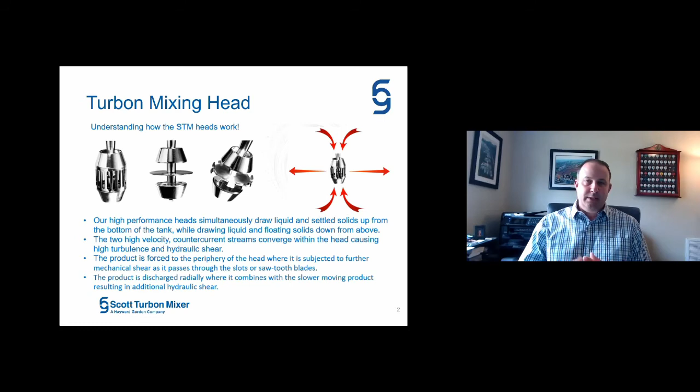A quick mixing overview. So yes, there is a mixer that can provide both flow and shear, which is what I was describing with the impeller vanes. These are shear controlled processing, gas dispersion, homogenizing, emulsification, powder incorporation, and dispersion. This is where you really see a lot of our products incorporated: viscous blending, solid suspending, and liquid blending. We can also handle that because of the uniqueness of our impeller. A lot of times, especially with solid suspension, you'll see more incorporation with a low shear mixer like a Lightnin mixer.

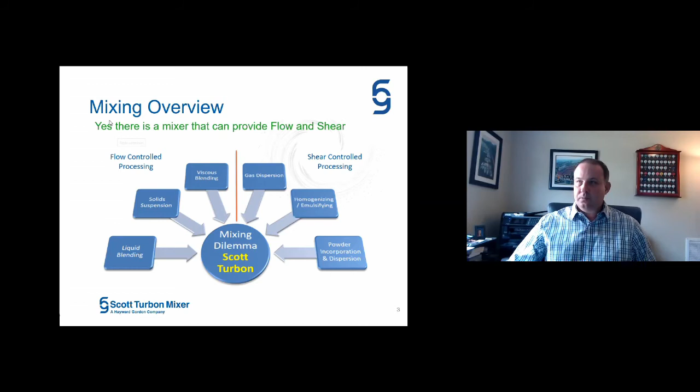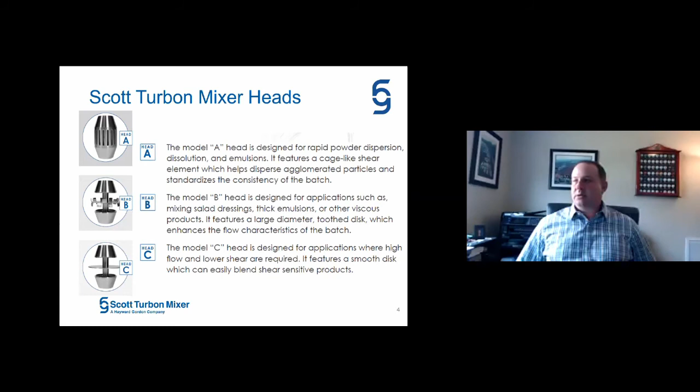So we have three head designs: the A head, B head, C head. The A model head is designed for rapid powder dispersion, dissolution, emulsions. It features a cage-like shear element, which helps disperse agglomerated particles and standardizes the consistency of the batch. The B head is probably the most used within the Scott Turbon line. It's designed for applications such as mixing salad dressings, thick emulsions, or other viscous products. It features a large diameter tooth disc, which enhances the flow characteristics of the batch.

I'd say 75% of the applications I've come across have had the B head, and probably another 20% are the A head. There's just a small category with the C head where they're looking for flow, but not as much shear. So the A will give you the highest amount of shear, and the C the least. Now, is the A and B mostly radial flow? Like a donut? Yeah, it's a little bit of both, but once it passes through the cones and hits that shear plate, it will be strictly radial flow. Okay.

And one thing we do, especially in hummus, which is a big thing for us right now, is sharpen these teeth to help get you a finer product, less chunky, more broken up. And they can come in welded designs. You'll like our LA1 lab unit. It comes with all three: you get the cone, and then the cage insert, the sawtooth insert, and the flat blade insert, and the cone is interchangeable with all three. There's a nut and a bolt at the bottom, undo that, pull the whole piece off, replace the center section, put it back on, and you're ready to go.

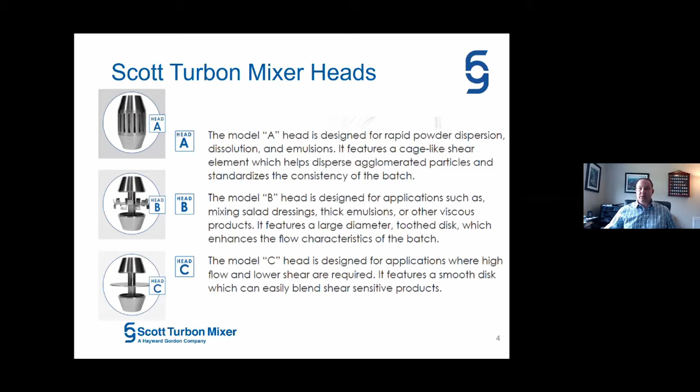Now, when you get into the larger units, the customer specifies which one they prefer. But we do a lot of trial units, and we can get into that later. That's the one thing I regret leaving out of the presentation, more on our lab units and our lab itself in Adelanto. But we can talk about that at the end and walk through it.

This is kind of the bread and butter of Scott Mixer. This is our top mount, our TM mixer. It comes in several different sizes. You'll see TM1 or TM2, 3, all the way up to 7. They can get rather large.

Pretty simple terminology and components. You got a motor, you got a bearing frame, a mounting flange, a shaft, and the head. They're direct drive units, and there's no bottom bearing in the head itself. It's freestanding.

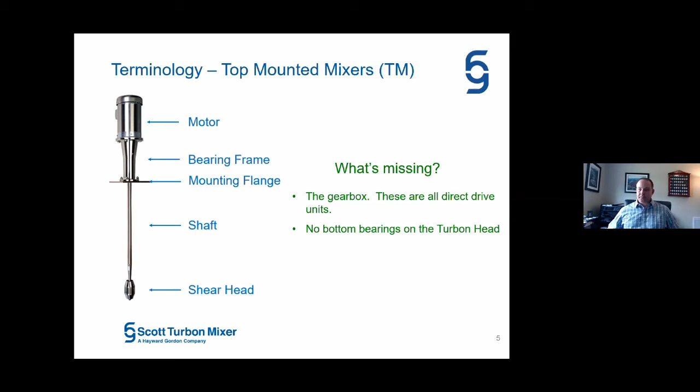So some of the benefits of the Scott Turbon mixer is reduced batch times. A lot of you guys probably attended our viscosifiers or viscosity modifiers little short course, but you can take incorporating a gum from hours or half days to minutes by incorporating it with a high shear mixer.

Proper dispersions, so reduction of waste ingredients and maximum product yield, bench to pilot to production scale up. We've got a lot of know-how with our scale up, increase capacity without adding an entire production line, batch to batch consistency, specifying the correct mixer for the application is obviously key, and low maintenance and easy to clean mixer heads. Not having that bearing and that rotor stator really makes it pretty much maintenance free, and the cleanability is much easier.

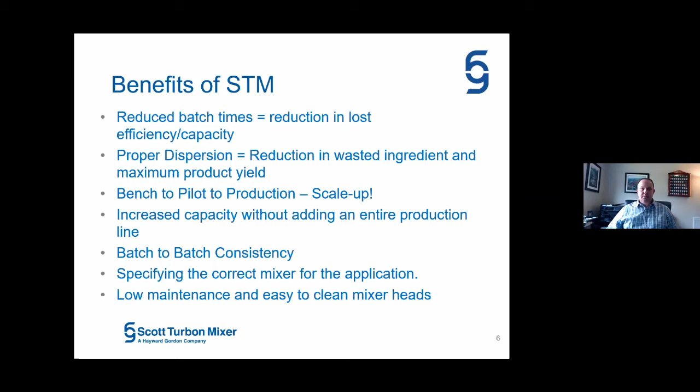Talking a little bit about our scale up knowledge and how we can do that. This is what we call our LA1, which we have two smaller versions. This will handle up to a 5-gallon bucket, maybe 3 to 4 gallon mix batches. This does actuate, so it raises up and down with this actuator in here.

We trial these quite often. What we usually do is we usually have about 2 to 3 of these on the shelf at a time, so typically they're ready for immediate shipment. And I would say 75% of them don't come back. So we try to usually ship them new because most customers end up purchasing them.

And then we can move to a little bit larger scale trial units. Depending on application, some people use these as production units. But on the pilot scale, this can also be something that's on a trial agreement and done at the customer site. But we can also perform these tests in our R&D facility in Adelanto, and the units are available there. Customers can come out and use the lab, or we can do the trial, have them send the ingredients and do the trial for them.

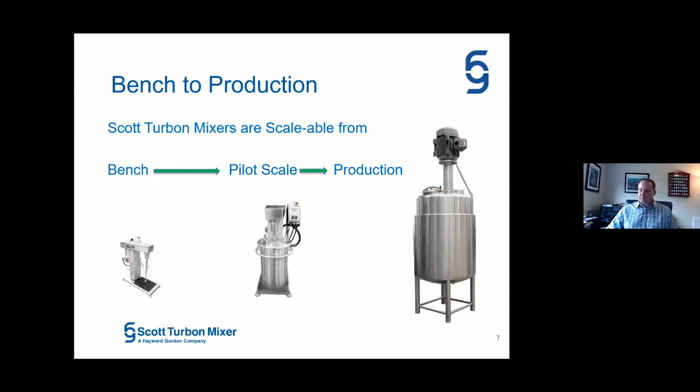We also have the bottom mount mixer. We have them both in direct drive and belt drive. This kind of gives you just a layout of what the belt driven looks like. Here's the unit itself.

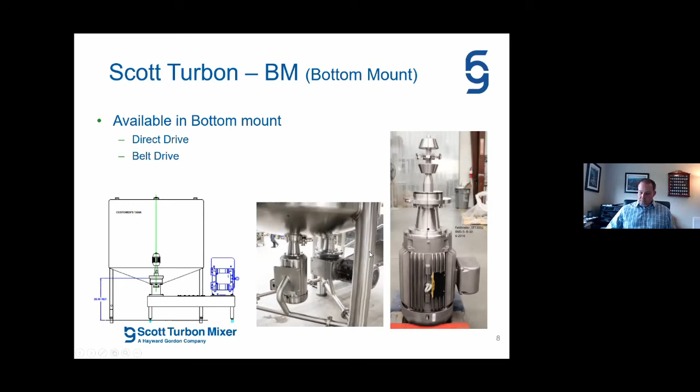So another product that Scott Turbon has that we've done really well with, and this has really lent itself to the food industry, again, the dressings and sauces, but ketchup, mayonnaise. We do quite a bit with mayonnaise production, and mustards, basically any of your condiments, barbecue sauce, is our hydraulic ram units for production scale.

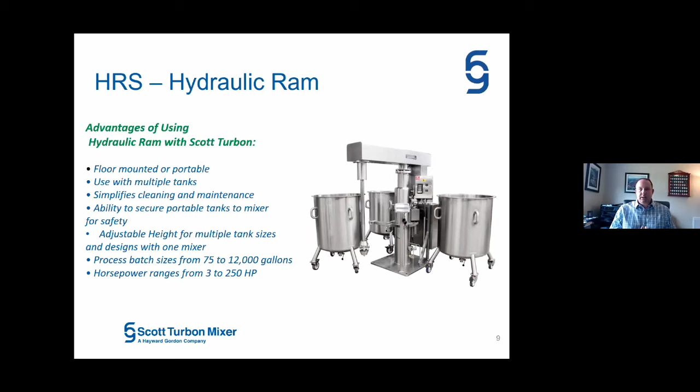Another product that you all have to offer is our VacuBlend powder induction system. The VacuBlend system offers the benefits of the inline mixer coupled with a vacuum pump to incorporate powders. The HSM or HSP, I'll get into that when we get to the inline mixer, but those are our two different models of inlines that are available. Ingredients are pulled through either a wand or integrated through a hopper, and then processed into the system.

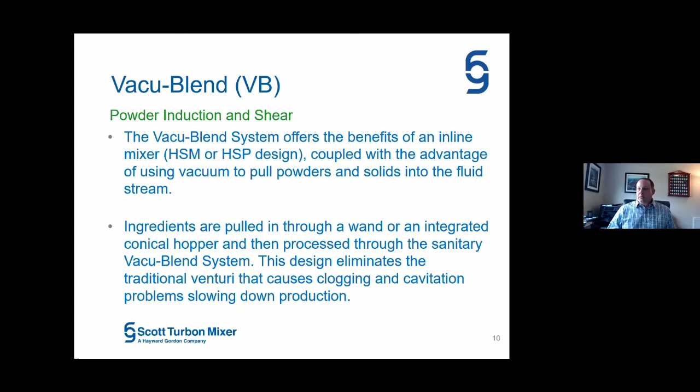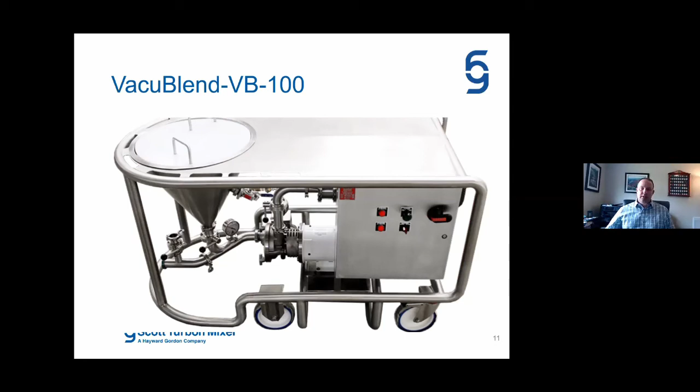This is a really good application if you see people up on top of a tank, maybe a small platform, having to manually lift all the bags of product up to the top of the tank to dump it in. This is slick because you can basically install it right down at ground level and hook your hoses up to it, and then you can do it in one pass into the vessel, or you can make it a recirculating piece of equipment.

Some other stuff, and you'll see this is where you're talking about the cosmetic world, but we'll do vacuum process vessels and mixers to incorporate a scrape agitator and a high shear agitator at the same time, as well as all the controls to go with it. So we can get pretty elaborate with some of the designs and some of the things that we can do.

Yes, Justin, you have this in lipstick, mascara, just about any type of... Yes. Maybelline and all the big users. Yep, and yes, Mary Kay is a big customer that has got some of our units. We also do a lot with creams and lotions and ointments, especially pharmaceutical grade type ointments.

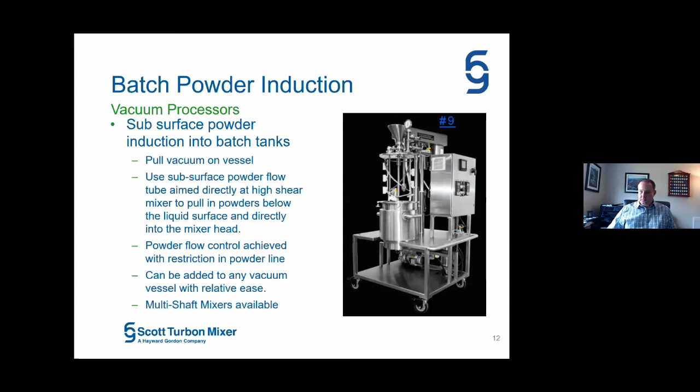Our inline shear pump. So the HSP or HSM, available in both configurations. Shear pump for pumping with rotor stator. And I wish I would have added another picture here of the mill head or the heads themselves. But the only difference is basically your rotor and your stator. We've got one that basically provides more pumping. This is not meant to be a primary pump. This is meant to emulsify or introduce powders or shear.

It's meant for shear. But we have one version that does a better job at pumping than the other, and the other does a better job of milling than pumping. So they both do create flow. We just need to look at how far and how high they're trying to push the product. But we offer the two different types depending on what the customer's trying to do. It's just a swap out. The HSM is a little bit more expensive cost wise, just because of the machining time.

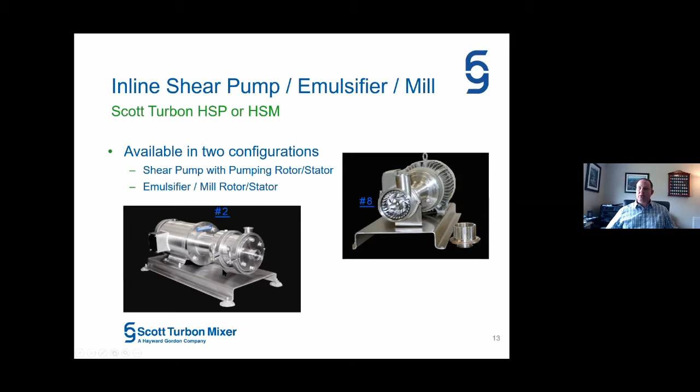That's why I wish I would have tried to find a picture for the two different headsets. You'll see one that definitely has just more vanes in it and less teeth, for lack of a better term. Where the mill set is a lot more busy, a lot more teeth involved in it. So the time to machine it is significantly more. But this is what you'll find inside, also incorporated in the VacuBlend.

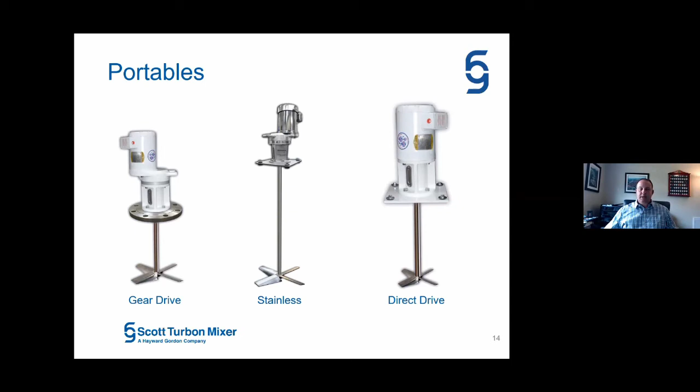We do offer a line of portables, sanitary portables, through our partners with Sharpe, but we white label them with Scott Turbon. So they will come out as a Scott Turbon mixer. But we've got lots of decades of experience with the portable line behind us, with lots of different options, mounting configurations. So as you all know, there's portables everywhere.

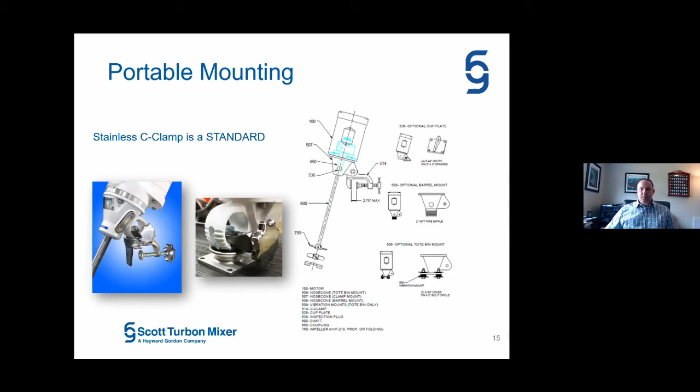In my past experience, when I came from Mikado, Mikado was not good with portables at all. They didn't even do them. I'm not sure how Lightnin does, if that's a big play for them or a big push, but you've got them available here as well. And we know the sanitary market with them. So lots of options from air motors, couplings, shrouds, mounts. We even have lifting systems available that we can also incorporate with them.